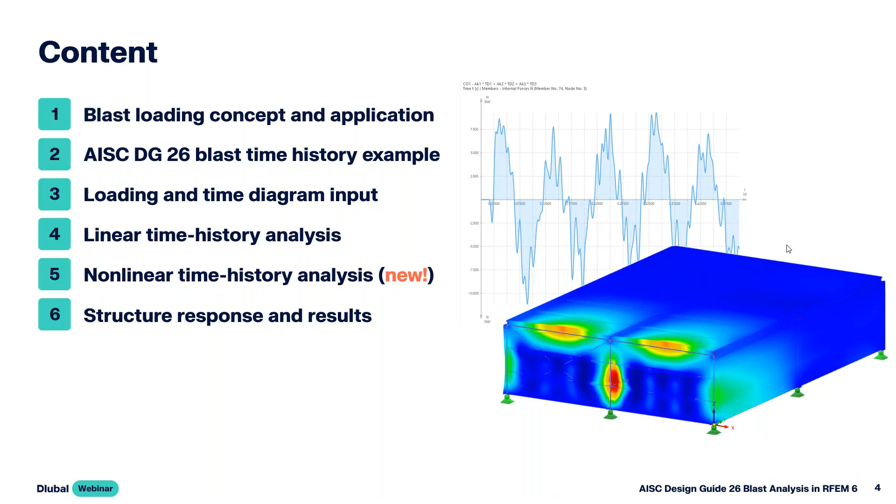So we'll turn now to the blast loading basics. The design resources that we'll be referencing today is, of course, the AISC Design Guide 26. This is the design of blast-resistant structures.

Now, the United Facilities Criteria, UFC document 3-340-02, will also be what we reference today as one of our resources. Now, there are many other references, literature out there for a blast analysis, but again, for our approaches and example today, we'll be utilizing these two.

Let's talk a little bit more about factors that are going to influence the structural damage when we talk about these rare blast loading. So the structure materials, the mass, the stiffness are all certainly going to influence this. But we also want to take a look at the explosive type. How close is the distance to the structure? Obviously, if the explosion is closer, we're going to see more localized and global structural damage than if the explosion is further away. The building geometry will also play an influence.

And then the blast orientation to the structure. So elements facing the blast will see higher loads and more damage than what we see of the elements that are parallel to the blast. And finally, the surrounding structures or adjacent elements. These can also affect blast patterns. We could see load amplification or load reduction.

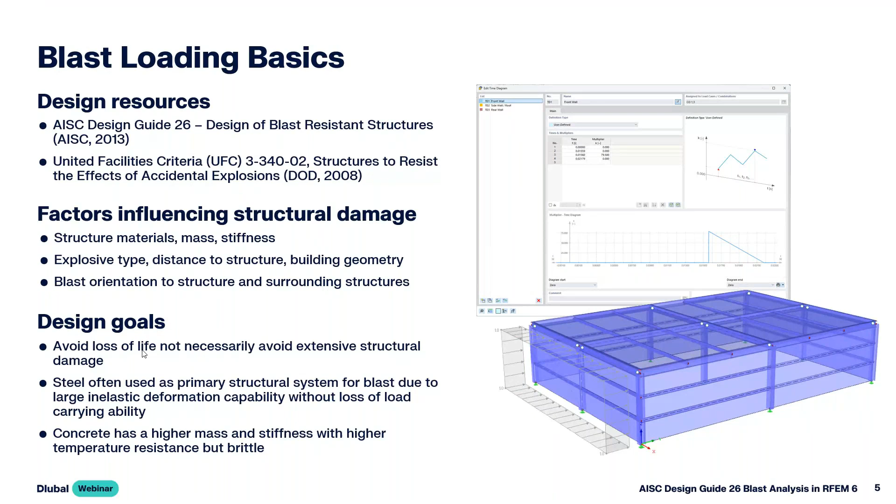So turning now to Design Guide 26 to talk about the blast load application and this idealized pressure time history for blast load.

Over here on the right-hand side is taken directly from the design guide. We want to talk about a few of these variables that go into creating this diagram itself.

We start off with the peak overpressure. This is the pressure above the ambient atmospheric pressure, hence the name overpressure, and it's an instantaneous pressure arriving at the structure. We have this blast load taking place at time equals 0. It takes some time for the blast wave to reach the structure, so we have our time of arrival, and then we see this instantaneous rise in pressure on the structure itself.

We then have the positive phase duration, which is the time for the pressure to return back to ambient pressure. We also have in the positive phase duration what we call the positive impulse, the total pressure-time energy applied during the positive duration, simply the area under the curve. In addition to the positive phase, we also have this negative phase duration, which is the impulse, that area under the curve, that follows the positive phase where pressure actually falls below the atmospheric pressure.

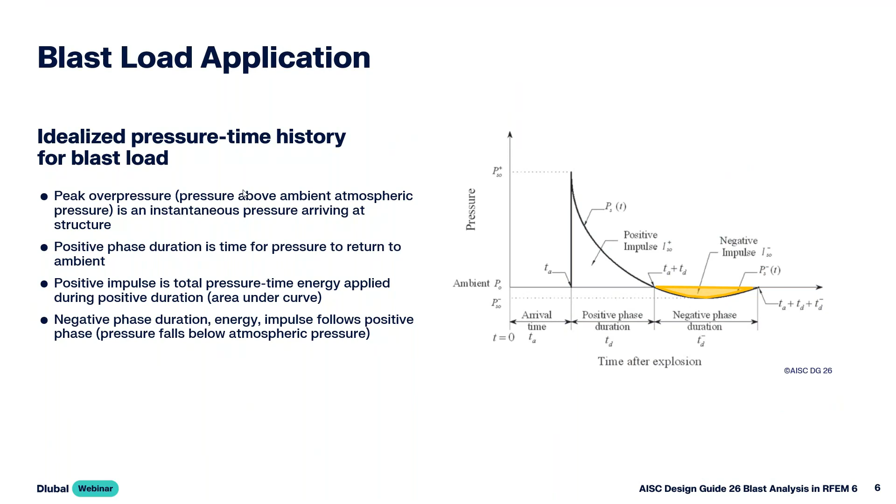This same diagram is shown over here on the right-hand side, but you'll notice we have a couple different lines here. The first is the free field blast load, represented by this dotted line, and then we have the solid line that is the reflected blast load. Let's go into a little bit of detail regarding the differences between these two.

We start first with the free field blast load, also known as the side-on blast load, where this blast actually travels parallel to a surface. It more or less sweeps over this surface with no impeding objects, so we might be talking about sidewalls, a roof, a rear wall—certainly not the surfaces oriented directly to the blast. We often see the subscript SO for side-on used throughout literature to represent this particular loading.

Then we have the reflected blast load. This is where the blast load strikes at an angled surface other than parallel, so we might see this for a wall oriented directly normal to the face of the blast load itself. You'll notice that we have a reflected pressure, P sub R, that's significantly greater than our side-on pressure, and this makes sense because it's closer to the blast and oriented normal to the face of it.

We calculate P sub R with the equation shown here: we take the side-on pressure, the incident pressure, and multiply by what we call the reflection coefficient C sub R.

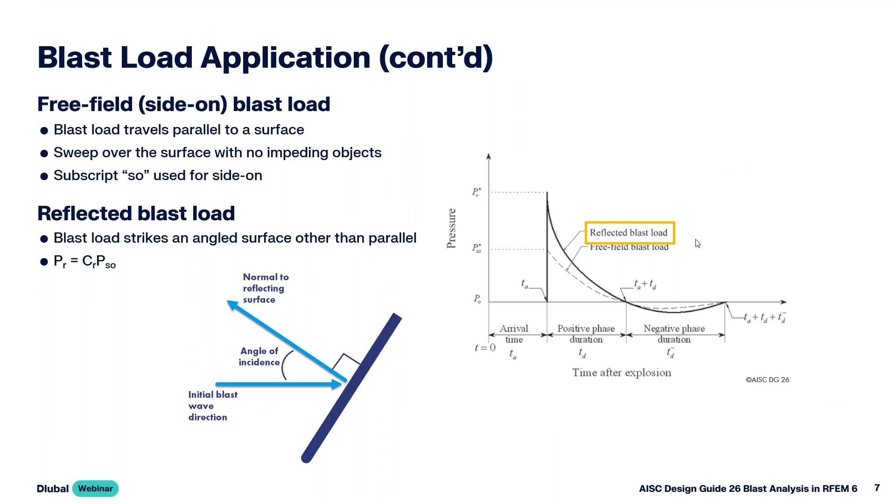We are going to reference the UFC document 3-340, in particular figure 2-193. Within this plot along the x-axis, we can see the angle of incidence. We would determine what our angle of incidence is, follow this up, and you'll notice that the peak incident overpressure is given with these various colored lines, also known as the side-on pressure. We follow this over to the y-axis to get the reflection coefficient value.

Now, we may be wondering, what is the angle of incidence along the x-axis? We'll refer to this small diagram over here on the left-hand side, where we have our initial blast wave direction, and this travels to our target element—this might be a wall element, for example. We're going to see this load reflecting normal to the face of the surface, hence why we see this 90 degrees here. The angle of incidence is measured as this initial blast wave in comparison to this reflecting load, and this is ultimately what we use with figure 2-193.

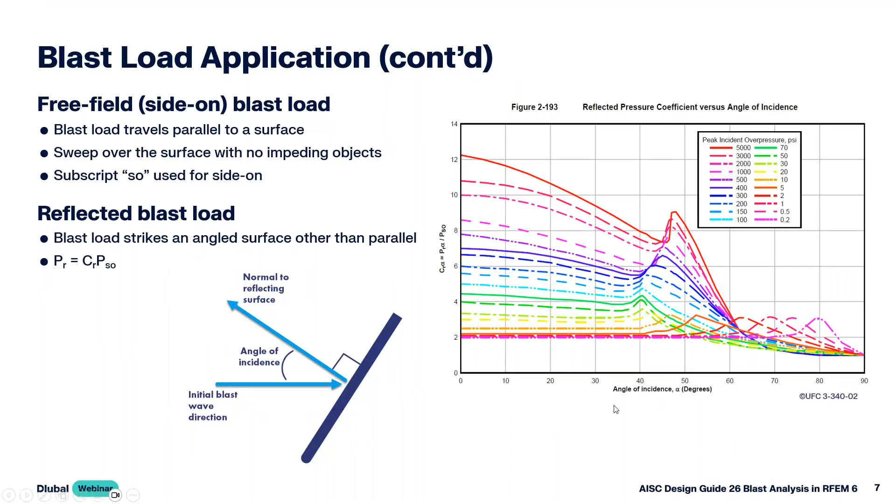Turning now to Design Guide 26, let's look at the assumptions here for creating these time diagrams, beginning first with the pressure time history positive phase. Design Guide 26 states that we can simplify this to a triangular distribution, where we still have this instantaneous rise in pressure, but instead of a curved decay, we have a linear decay back to the ambient pressure. It's really important that we still maintain that peak pressure value and the impulse, which is the area under the curve. So therefore, we have this fictitious time here that we need to determine in order to simplify this with this triangular distribution.

The equation that we use for this duration is equal to 2I over P.

Moving on to the pressure time history for the negative phase, we're actually going to neglect this for this demonstration. So a little bit simpler approach here, but we certainly don't want to always neglect this. For example, when we have elements that are weaker in the reverse loading direction, or if we have a structure with very short natural periods compared to the load duration, then we certainly don't want to neglect this negative phase. But again, for example purposes for us today, we will go ahead and not take this into account.

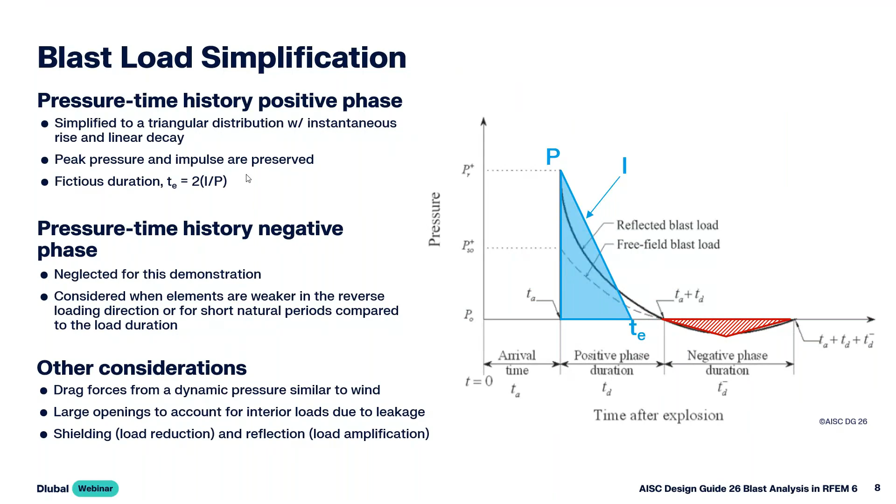Also, we talked a little bit about those adjacent objects. If we have buildings that are in front of our target structure that we're designing, this could certainly be beneficial because we would see the shielding or a load reduction. But in turn, these adjacent objects can also cause a reflection or load amplification. Again, not considered for today's example, but all very important points to consider if you are carrying out a blast analysis. So we're now going to turn to RFEM 6, and we want to begin our example today.

Now, we won't be touching on either of these more seismic focused add-ons for today. But finally, we do have the time history analysis, and this will certainly be a big part of our example once we do get into RFEM, where we can apply these forces to the structure and tell them how they should vary in magnitude over a set time period.

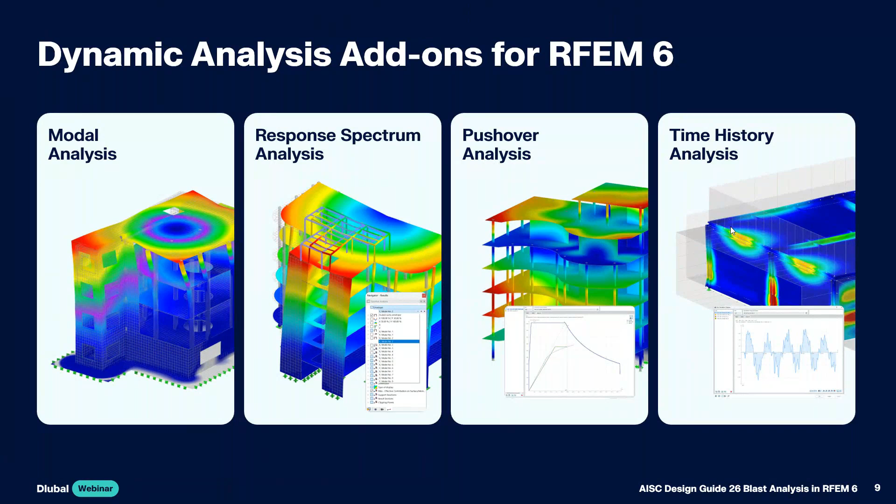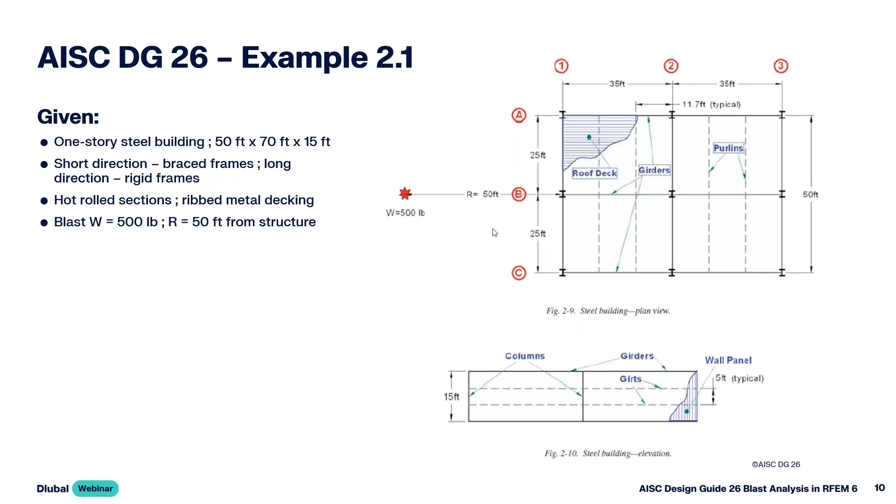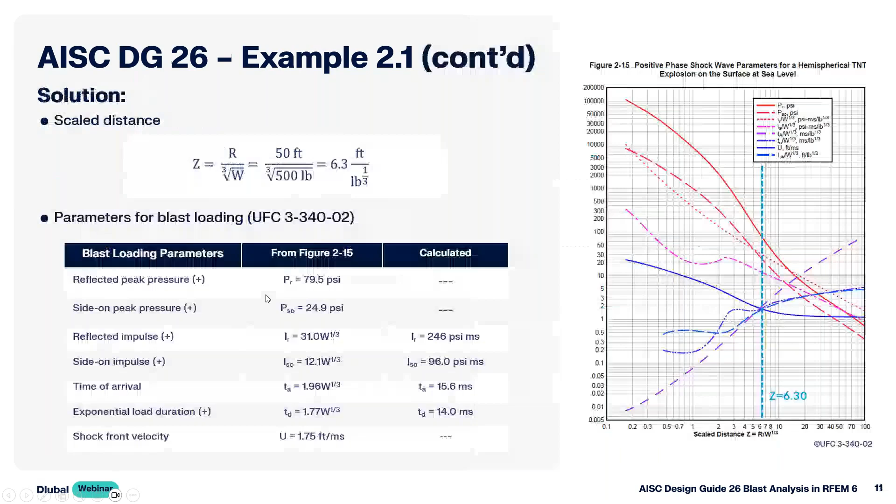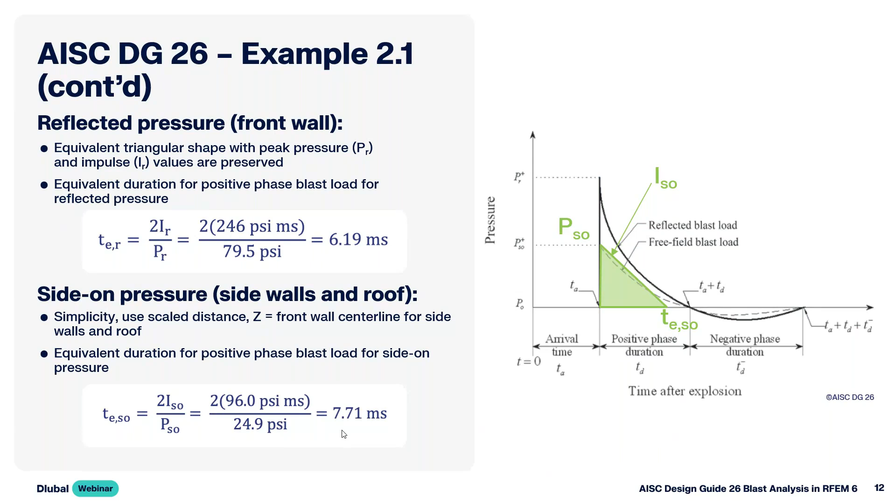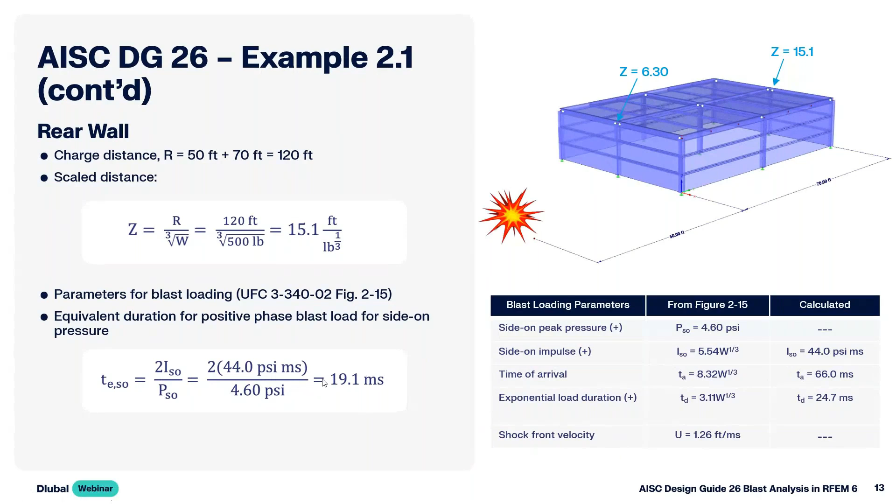Now, the rear wall is a little bit unique too, in the fact that we aren't going to have this instantaneous rise in pressure, like what we saw with the front wall or even the side walls and the roof. It's going to take some time for the pressure to linearly increase to the value of the peak pressure, and then we linearly decrease. So we know the time of arrival, that's equal to 66 milliseconds.

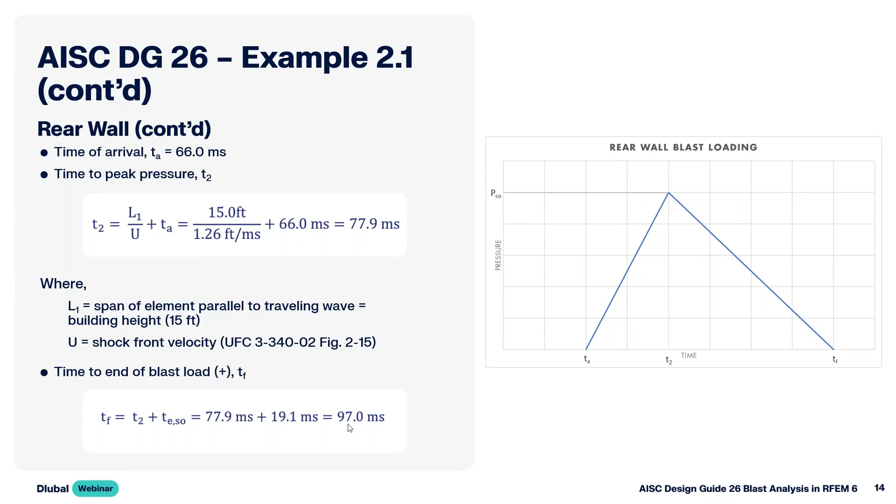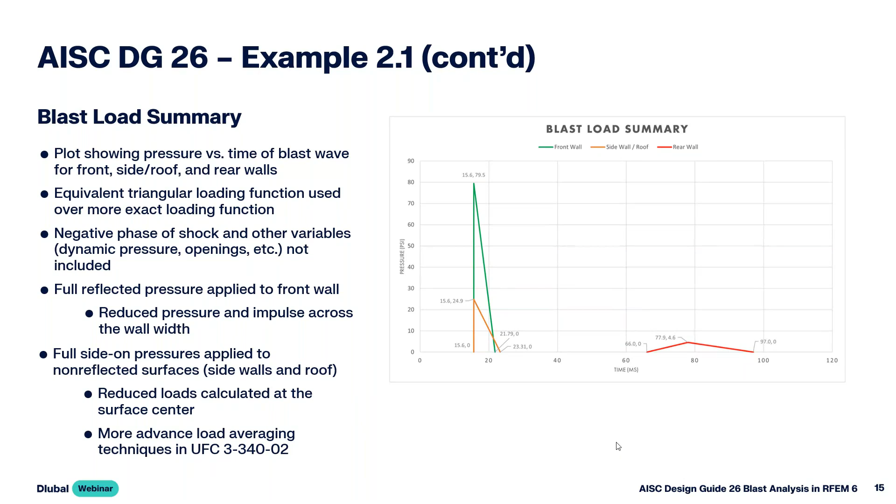Okay, so we are going to turn now to RFEM directly, and I will go ahead and launch the program here. So you'll notice for the sake of time, I have already modeled our structure from the Design Guide example given. So we'll do a quick model review. There were some assumptions made, for example, with the cross sections. So we have W14x193 defined for our columns, A992 material.

Our girders are defined as 18x130. We do have our purlins here, channel sections, 10x25, A36 material, and then we have our girts, which are 10x30, also A36. Now, because we have braced frames in our short direction, I did add in here some X bracing. And these are just going to be round circular sections, such as a rod, for example. But you'll notice that the member type here is unique.

All the rest of our members in this example are set to a standard beam. This is anything that's a standard beam, a standard column. But for my X braces, I have set this to a tension-only member. This means that it should only take tension forces. If compression is introduced into this member, it is deactivated within the static analysis. And if tension is reintroduced, it will be reactivated due to the nonlinear capabilities within RFEM. So just something to keep in mind there.

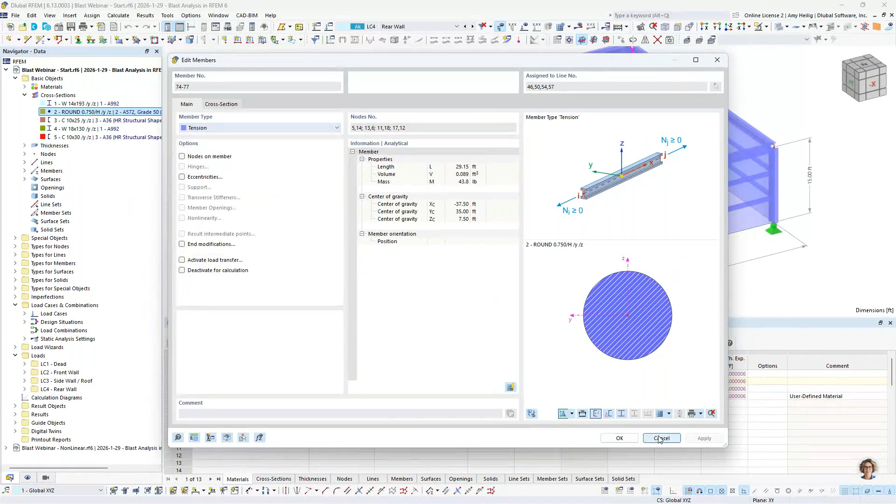Now, as far as our surfaces, all the surfaces are defined here. So we'll take a quick look at the front surface, for example. All have the material A653 applied to them and a set thickness. Now, this thickness is a bit unique as well. So if we take a look at the thickness type, normally we would set this to a uniform thickness, which is just any type of standard surface. But I did set this to an orthotropic stiffness instead.

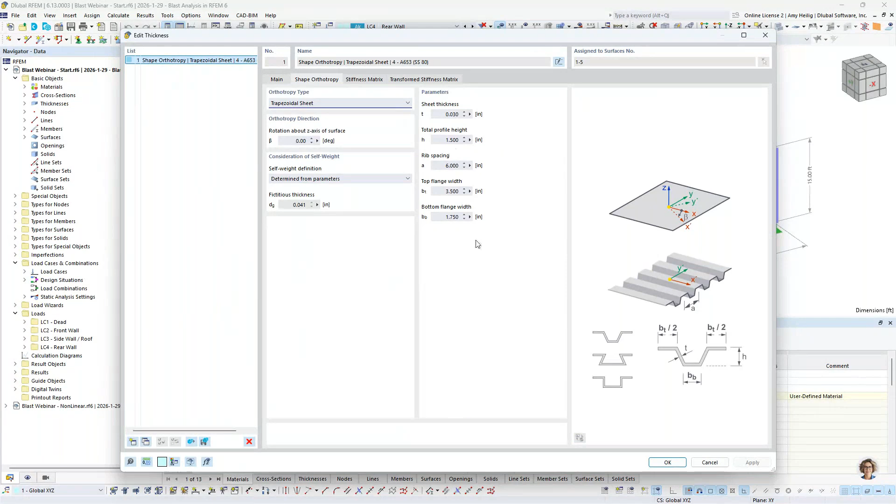And with this orthotropic entry, we now get this second tab here where I can directly select something like a trapezoidal sheet. And I can input the sheet thickness, some of the geometric properties like the total profile height, the rib spacing, and so on. And the program is going to take all of this information and directly calculate the stiffness matrix based on these orthotropic stiffness properties. So this is all done automatically, and you have a nice view here of the stiffness matrix directly.

Okay, so the final thing just to note is, of course, the dimensions. We talked about 50 feet in the short direction, 70 feet in the long direction, 15 feet in height. And our blast analysis is going to be taking place about 50 feet away from the front face of this wall here. Now, we also want to cover our loading.

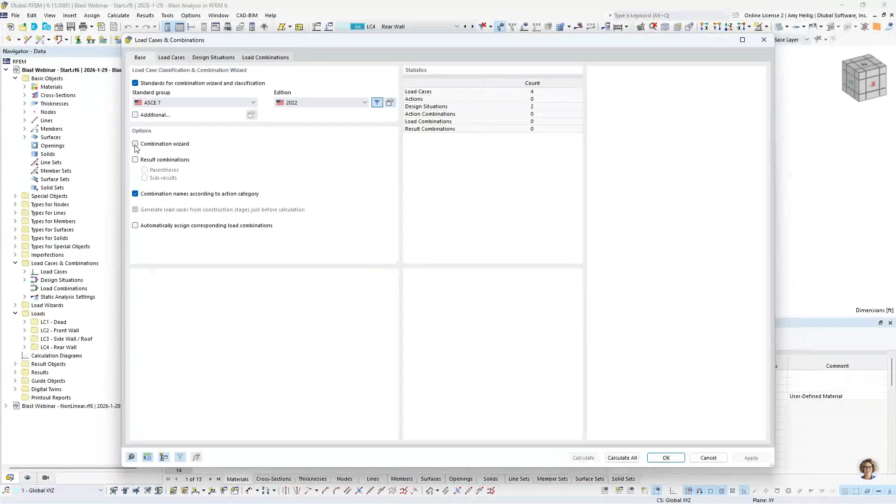So I will launch our load cases and combinations dialog box. And under the base data, I have set here the ASCE 7, the latest 2022 standard. Now, this really doesn't play too much of an impact in our example today because I'm not generating my load combinations automatically. You can see this is turned off here. Now, under the second tab, these are the various load cases that I've defined. And we start first with our dead load case. So we have self-weight activated within this load case. And I did assign the action category here based on the ASCE 7 to dead load.

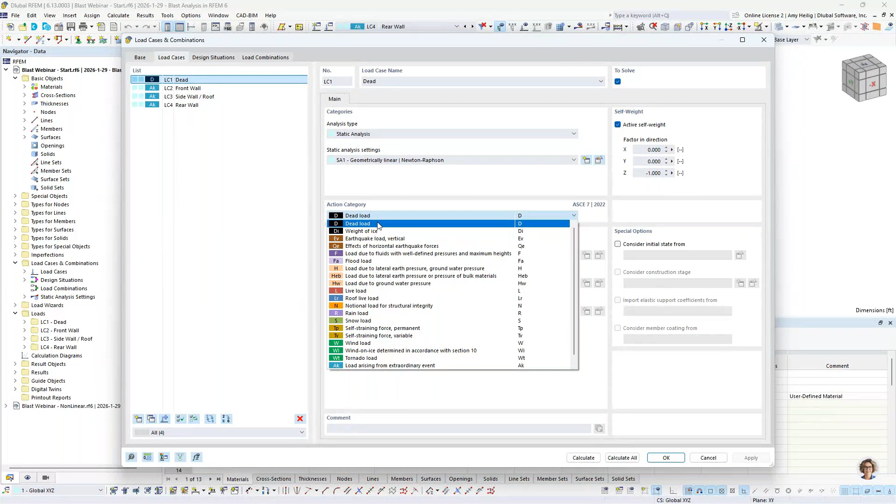Now, again, this isn't so important. If we were combining into the load combinations automatically, the program would need to know this in order to know what load factors are defined. But just for a nice categorization, we'll go ahead and apply this to the correct action category. I have 3 additional load cases here, including the front wall, the sidewall and roof, as well as the rear wall. So this is going to represent these loads from the blast being applied to the structure. The action category here is set to the load arising from extraordinary event.

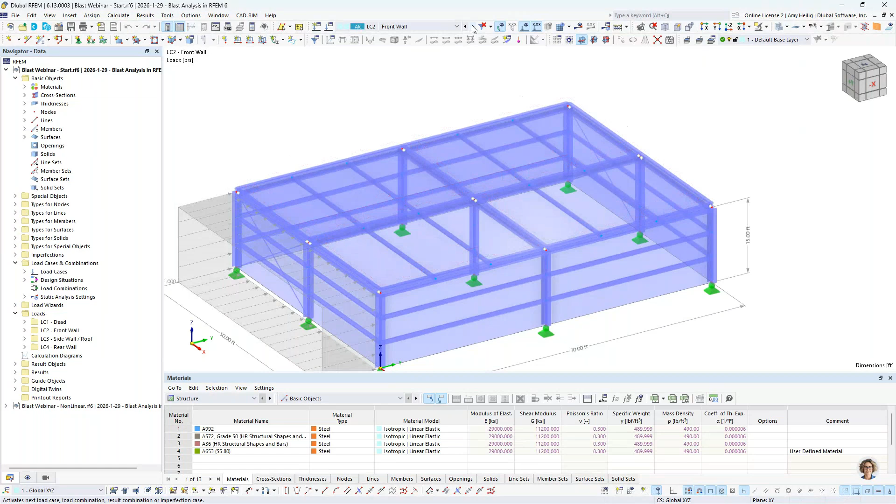So now that we have our load cases defined, we need to actually apply the loads to the structure. And we begin first with our dead load. So remember, self-weight is considered here, but also I have applied an additional member load to my main girders up at the top of 0.1 kips per foot, just to account for any additional dead load within the structure. I then have that first load case here for my front wall. So you can see that this is a uniform load applied to this front face of this surface.

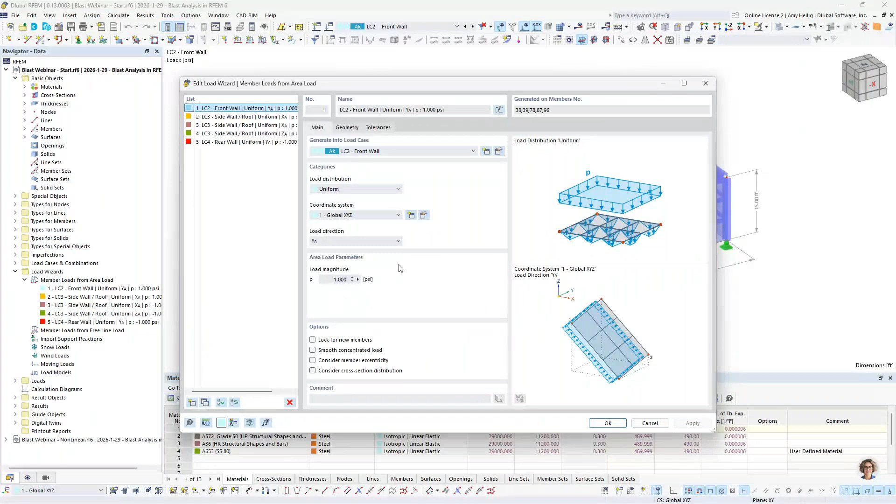Now, this load is a bit special in the sense that I did take advantage here of our load wizards over in the navigator, where I can apply these as member loads by specifying an area load. So if I double click on this load, we go into the load wizard dialog box. I have applied the load in the global Y direction towards that front face of the structure, and I gave it a load magnitude of 1 psi. This is just a simple unit load. We're going to later on define the time diagram where this load is going to vary in magnitude. So we don't want to do it here with this applied load. This is why it's just a simple 1 psi.

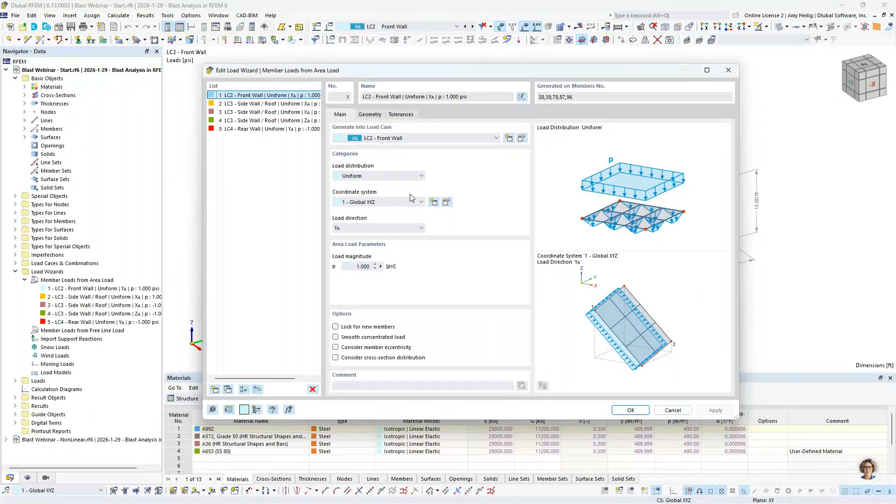Now, if any of your units are incorrect, you can always access down here the units and decimal places and make adjustments to that. We also have the ability here to select the 4 points for this area load, and we can also neglect members. So for example, I didn't want to consider the load being applied to my girts.

So once this is done, you'll see we get a nice view here of the tributary area of the members that this load will be applied to. And we can take this a step further by right-clicking and displaying separately to see the load actually applied to the structure itself and the particular members that I have selected.

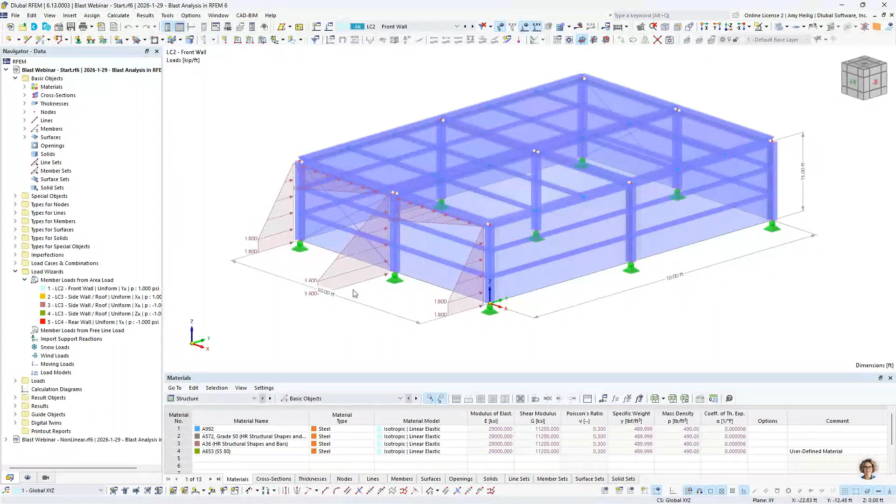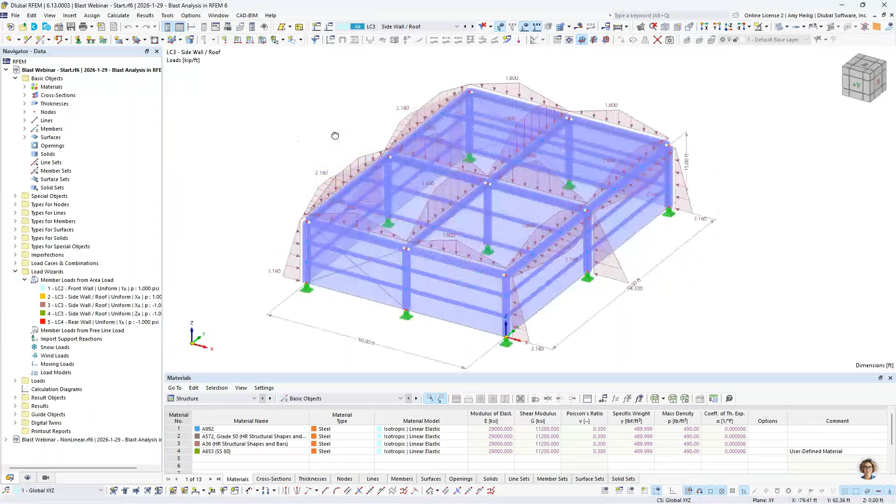So we can right-click to turn this back to a uniform load display, and we can take a look at our second load case for the blast load. Very similar concept here, but this time it's applied to the sidewalls and the roof. We can right-click here to display separately, and again, we see those loads distributed here to the main members, neglecting again the girts and the purlins. And finally, we have our last load case here for our rear wall, so same concept there.

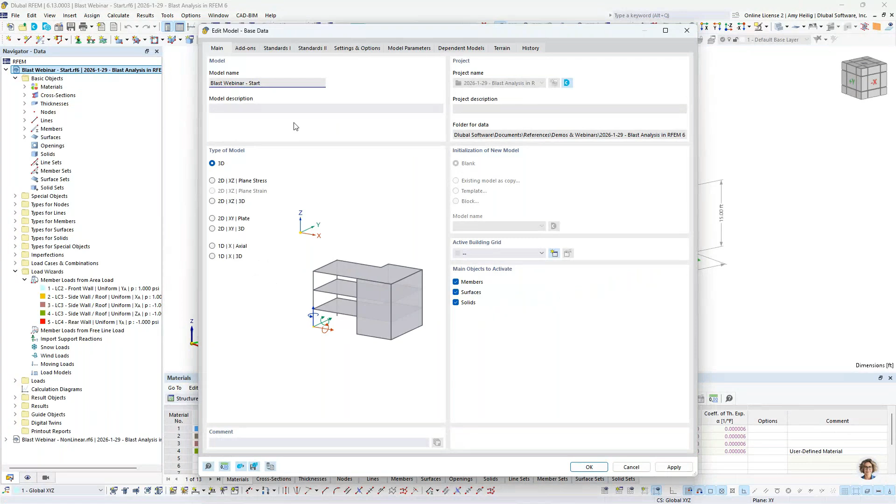So now that we have these loads defined on the structure, we're ready to move forward with our dynamic analysis. And for this, we need to activate our base data dialog box. So this can be found by right-clicking on the model name here in our navigator, or it can be accessed through our quick tools up here in the top. This is essentially the dialog box that will pop up when we create a new RFEM model. And under this second tab, you'll see here, these are the various add-ons that we can go ahead and activate within our RFEM model itself.

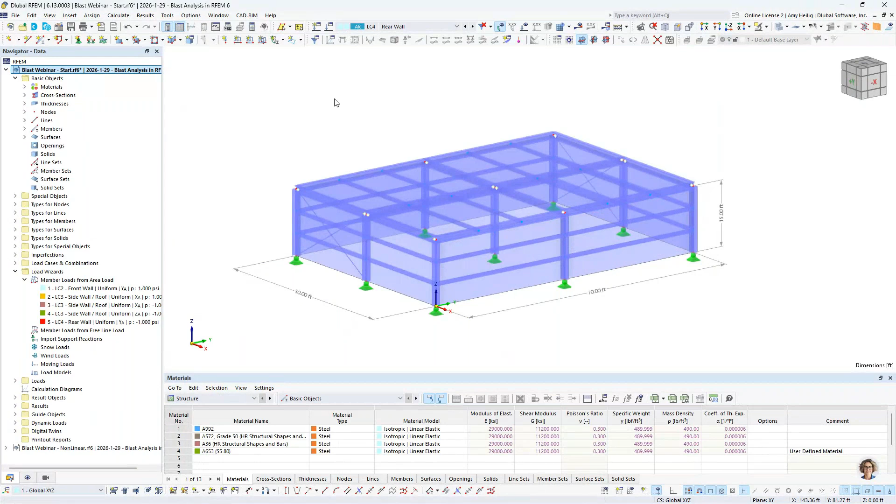For today, I am going to move forward with both the modal analysis and the time history analysis. So when we activate those add-ons and come back into RFEM, you can see that really doesn't look too much different. So what we want to do is to go into the load cases and combinations dialog box, and I'm going to create a new load case here. This is going to be for my modal analysis. Now the analysis type here is going to be toggled down to modal analysis. This is available to me because I've activated that particular add-on.

We then want to adjust the modal analysis settings. So for this, I'm going to calculate a total of 40 eigenmodes. I want to make sure that I get enough mass participation, that I kind of understand what's going on with our structure. We'll go ahead and leave this as the Lanczos solver. I'm going to modify the mass matrix to diagonal.

Now, remember that this load, this blast load, is traveling from the front of our structure to the rear of the structure in the global Y axis. And we can't see that because of this dialog box, but that's kind of what's happening there for the overall analysis. So therefore, just for a quick calculation and to really hone in on what's going on in the Y translation direction only, I'm going to deactivate the additional degrees of freedom here for my mass matrix.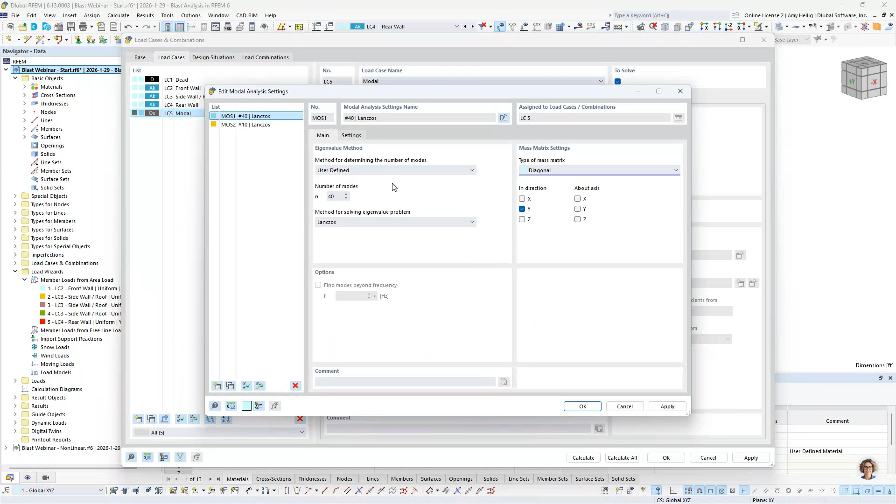Now, for any further information on the different mass matrix types, solver types, you can always click on this info button in the lower left-hand corner of these dialog boxes. This will take you directly to our online manual and this particular dialog box to explain these options further. Now, the additional settings here can all be left as default, so I can click OK.

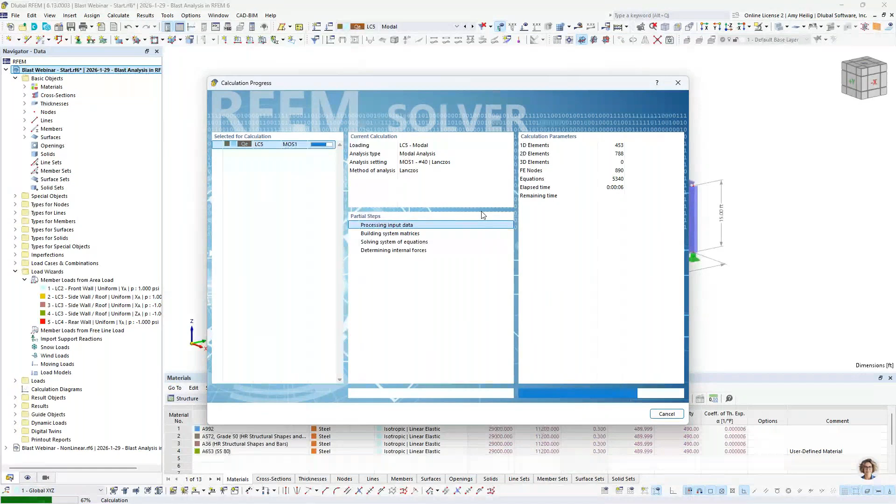We are going to import in the masses from our dead load case. We also have the ability, if we wanted to create a mass combination, we could do so. And essentially, we'll get a pretty quick analysis here. Again, the program is going to determine those 40 different eigenmodes, and we are presented with our analysis results. So you see here that we have our modal analysis results presented to us in table format, and we now have a new tab over here in our navigator with the results shown as well.

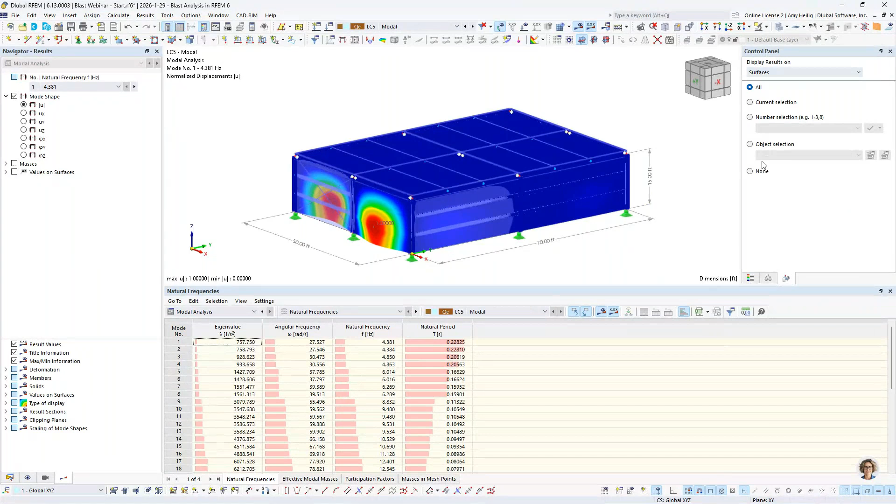Because these loads are being applied to the members themselves, I'm not so interested in what's going on here with the surfaces. So I can always deactivate the surfaces from the display of my results by toggling this to none. And taking a look at the members themselves, and in particular, the second tab within the table, we want to determine here what are our dominant mode shapes. So remember, we're only looking in the Y direction.

And as I scroll down through this table, I see mode number 9. This certainly has the most mass participation, so this will be one of our dominant modes. And I want to note here that the natural frequency is updated over on the left. So we'd want to write this number down, 8.832 hertz, because we're going to utilize this later on for damping purposes. And then we continue scrolling down to maybe find our second dominant mode, and that's going to be mode shape number 27. And we have a frequency here of 15.963. So we'll go ahead and write that one down as well.

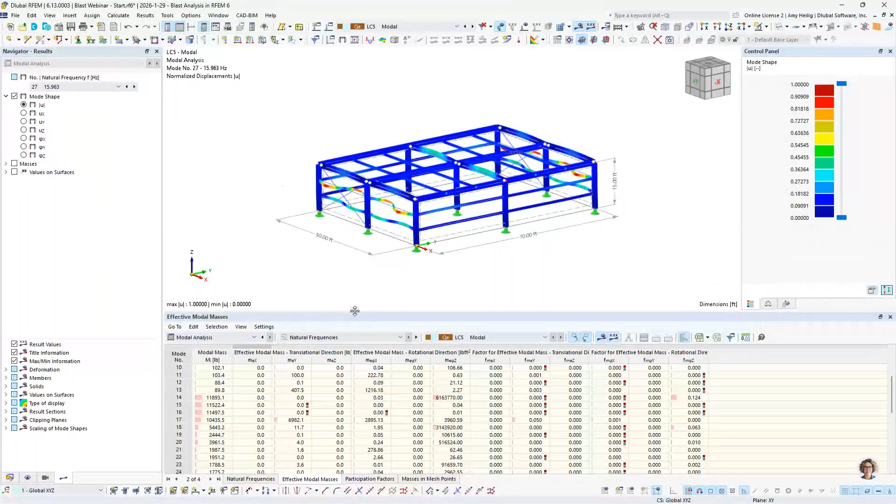So now that we have this information, again, it will make a little bit more sense as we move forward. And you can also view here under the first tab, if you're interested in viewing mode shape number 9, we can see the angular frequency, again, that same natural frequency, natural periods. And we probably also are interested in mode shape number 27. So just keep those natural frequencies in mind. We'll return back to them when it comes to inputting in the damping for the time history analysis.

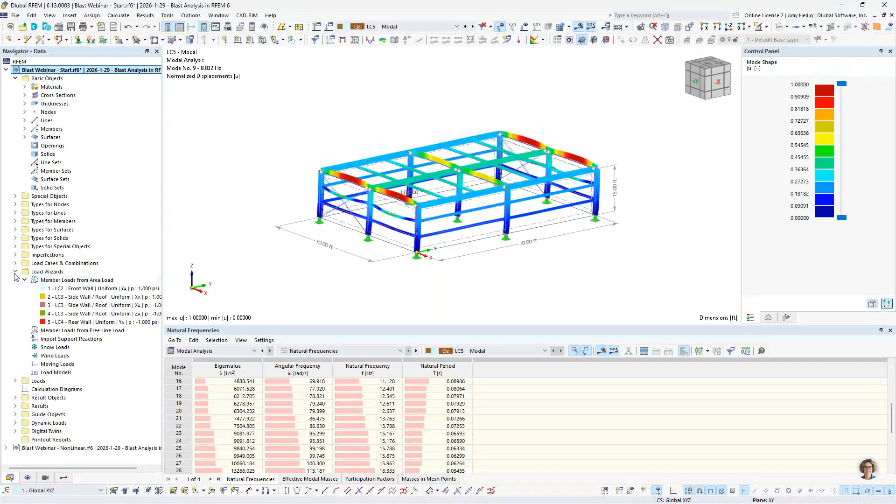So now that we have completed a quick modal analysis, let us move on to the time history. And in our navigator over on the left, we have a new folder here that you will see called dynamic loads. And this is because I've activated that time history analysis add-on where I can directly define my time diagram. So I double click to create my first definition here. And within my time diagram, this is where we're going to begin inputting in our information that we have determined from those slides and from Design Guide 26.

So we're going to start off first by giving this a new name here, and we're going to call this one front wall. Now, as far as our time diagram input, we have two options. We can set this to user defined, which we can just input in the table values directly. And that's certainly what we'll be using today. Now, alternatively, if you had a function, so we talked a little bit about that Friedlander equation to maybe represent that idealized pressure curve in a little bit more detail, you can input in something like that function directly in RFEM as well.

So for our front wall and taking advantage of the user defined option here, let us go back to the PowerPoint because I want to focus on this time diagram for the front wall only. And if you remember, we have already determined all of these points from our previous calculations. We have our instantaneous rise in pressure to 79.5 psi, and then this linear decay back to 0. We have already determined what these time values are at each of these points. So these are going to be the points that we directly input into RFEM for our first time diagram.

So we go back to the program here, and our first point is going to be at time 0 with a multiplier of 0. So remember, we're going to apply this time diagram to that unit load back in that particular load case that I showed you earlier to tell the program how to vary the load magnitude over a set time. So therefore, our second point is going to be 0.01559. The multiplier is still set to 0. But now finally, under the third input option here, we type in a time of 0.0156 with a multiplier of 79.5. And finally, our fourth point will be 0.02179 with a value of 0.

So you can see that our time diagram shown here in RFEM exactly replicates what we just saw in the PowerPoint example. Now you'll notice I don't have the ability here to set the same time for step 2 and step 3 here to 0.0156. The program will give you an error. So I had to offset this instantaneous rise in pressure just slightly with the multiplier of 0.

We know all of these times as we have solved for them. So again, this is the information we want to put directly in RFEM for our second time diagram. So the first three time inputs are actually all the same, but we do want to modify our multiplier here, which again is going to be that peak side-on pressure, to 24.9 psi.

And then our linear decay back to zero is also slightly adjusted from our front wall, and this will be 0.02331. So with the program plotting these various points, we now see our time diagram that reflects our PowerPoint slide that we were just taking a look at.

So we then have our final time diagram. And for this one, I'm going to create a new definition here, and this will be for the rear wall. We'll go back to our PowerPoint for the final time here to take a look at the time diagram we have determined for the rear wall.

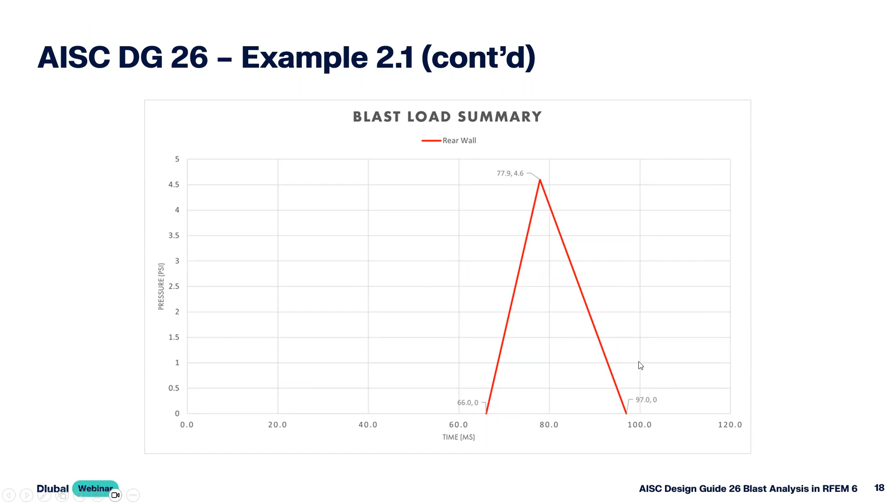Now remember, this one looks a little bit different because it does take some time for that blast wave to reach the structure, but we have a linear rise here to that peak pressure, and then we'll see it decay linearly back to zero. Again, we know all of these points here, so this is directly what we will input for our third time diagram.

The time zero with a magnifier or multiplier of zero, and then our second point will be 0.066, with the multiplier here also zero. Our third point will be 0.0779, and a multiplier of 4.6. Our final point is going to be 0.097 with a multiplier of 0. So therefore, we see that relevant time diagram shown here that replicates what we just saw in the PowerPoint.

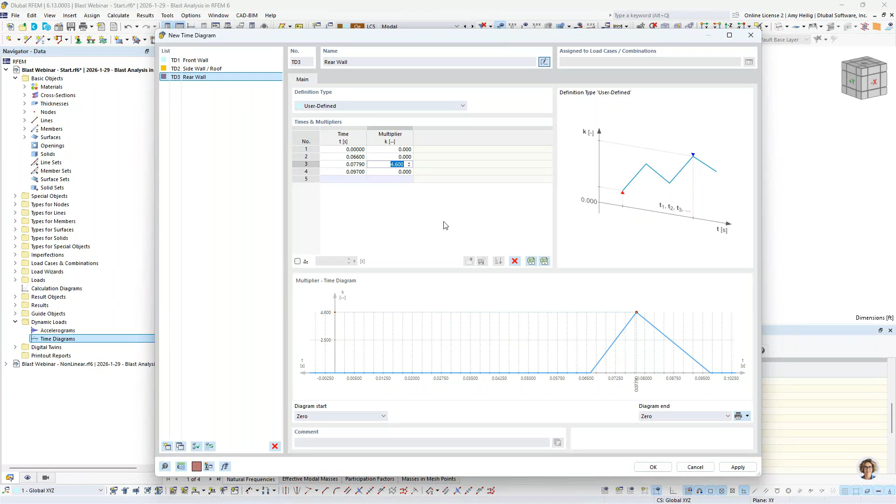Okay, so now that we have created these time diagrams, we need to actually correlate them with those unit loads that we had applied to our structure under the load cases. So we'll go ahead and click OK through this dialog box, and we're going to go into our load cases and combinations. Now, I certainly could run a time history analysis for these individual load cases, as you see here within our dropdown, but that's not the intent of this example.

The structure is not going to experience the front wall blast initially, and then the side wall and roof separate from the front wall and rear wall. All of this is happening at one time, but the magnitudes are going to vary over that time duration.

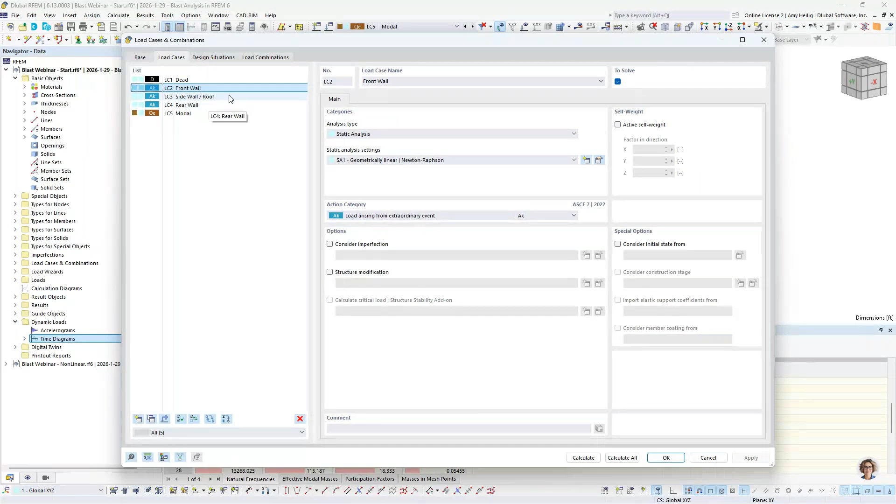And the only way to combine all of these into a single time history analysis is under our load combinations tab. So we create a new load combination definition here, and the analysis type is going to be set to time history analysis. Well, now we have our time history analysis settings that we'll want to go through in a little bit more detail here.

So within the dropdown, you'll see that we have two linear solvers, including the linear modal, which is going to be a decoupled system that's based on the model's eigenvalues and mode shapes. So a modal analysis with this solver is incredibly important. We want to make sure that we do have an accurate modal analysis.

Now, for our example today, we are going to utilize the linear implicit Newmark solver instead. So this is a direct time integration method. It does require sufficiently small time steps, but a big difference here is that we don't need that modal analysis whatsoever. So the modal analysis that we carried out earlier in this example technically isn't needed. I am going to use it for damping purposes, which will again make more sense in just a few minutes, but the modal analysis is not necessarily needed for this solver.

So with both of these linear solvers, keep in mind that any nonlinearities are automatically going to be converted to linear elements underneath the hood for this dynamic analysis. So if we had a nodal support that fails in uplift, but in downward compression fully re-engages, underneath the hood for the dynamic analysis, it will be just converted to a linear nodal support.

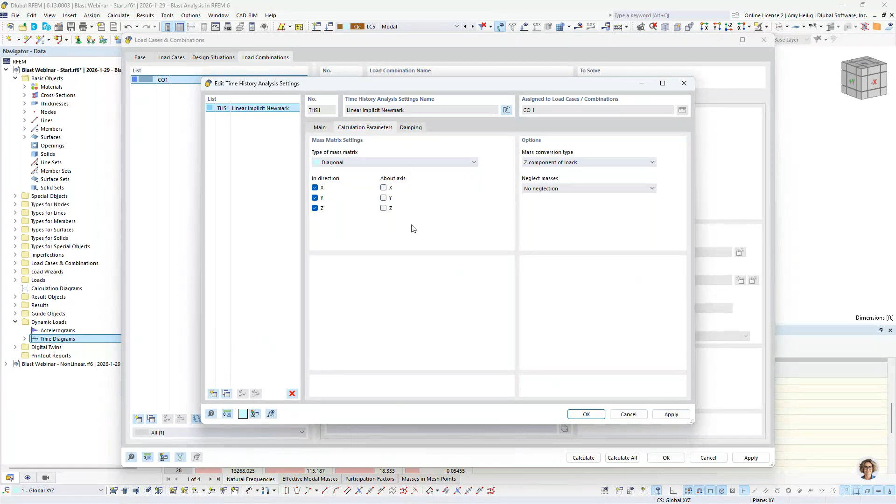For the calculation parameters, I will modify the mass matrix to diagonal, though there's maybe not too much difference between consistent versus diagonal here. I'm going to uncheck the degrees of freedom for rotation about the global axes, but leave translation activated for this mass matrix.

Finally, we have our damping. When we talk about the Newmark solver and damping, we always refer to the Rayleigh damping parameters, alpha and beta, where alpha is the mass portion of that damping matrix, and beta is the stiffness portion of that damping matrix. So we want to ensure these parameters are input correctly.

Most of us might be used to Lehr's damping, where we just have a set percentage to input for the damping itself. We have a nice tool here where we can convert from Lehr's damping to Rayleigh damping by inputting the natural frequencies of our two most dominant mode shapes. This should ring a bell - this is why we carried out that modal analysis to determine the two dominant mode shapes.

Remember, we wrote down the relevant frequencies from mode shape number 9 as 8.652 hertz, and our frequency from our second dominant mode shape, mode number 27, is 15.963. Now, the Lehr's damping is 2% for this structure, so I can input this information directly, and alpha and beta are directly calculated for me - a nice feature for the damping considerations.

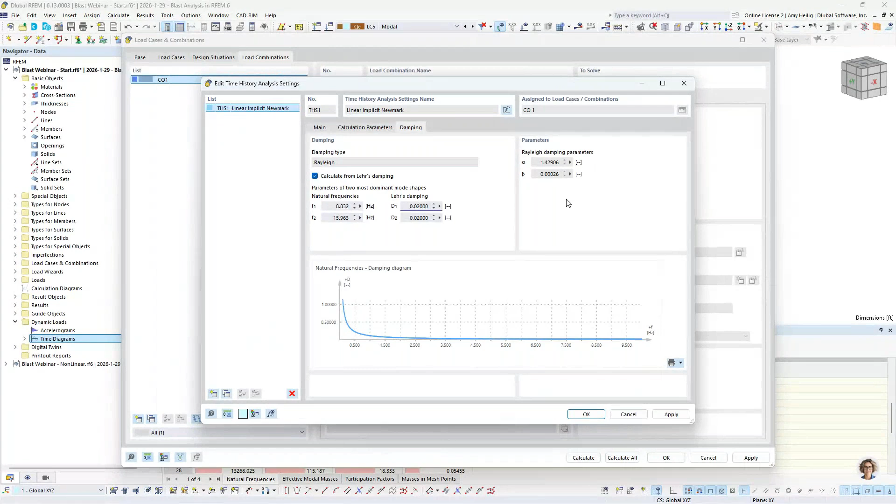Once all of this information is input, we're going to import the masses from the dead load case once again. Under the assignment, this is where we move our 3 different load cases over to the right-hand side by double-clicking on them and relating them to the relevant time diagrams. So we have our front wall related to time diagram number 1, our sidewalls and roof related to time diagram number 2, and finally the rear wall related to time diagram number 3.

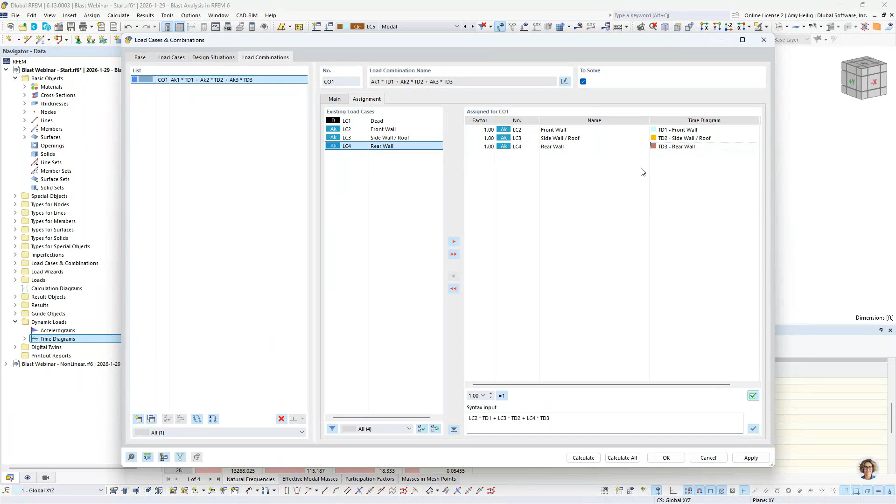So I'm going to begin this calculation here. For this linear solver and the time steps that I have set, we will see this solve pretty quickly.

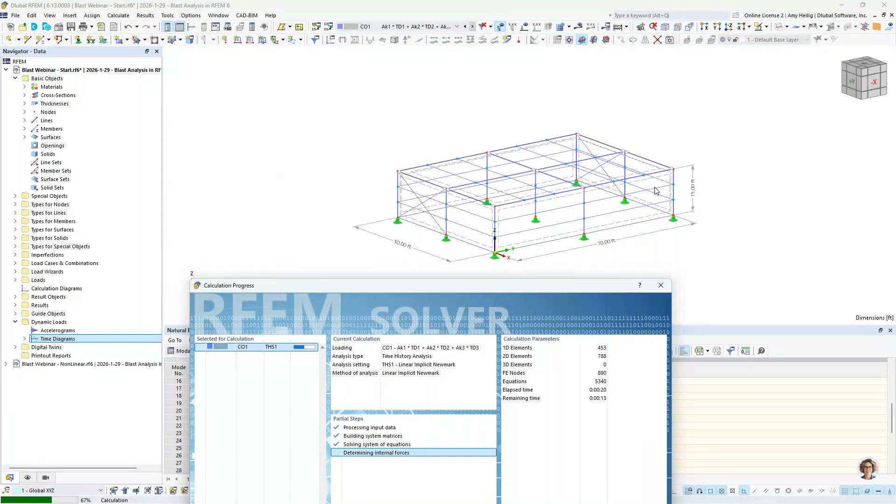So what's happening here in the background? We're now going to apply each one of those unit loads - remember, we had the area load at the front face, the sidewalls, the roof, and the rear wall of the structure. But now we're going to apply those 3 separate time diagrams to tell the program how the load magnitude of this blast wave should vary over the total time duration of 0.5 seconds.

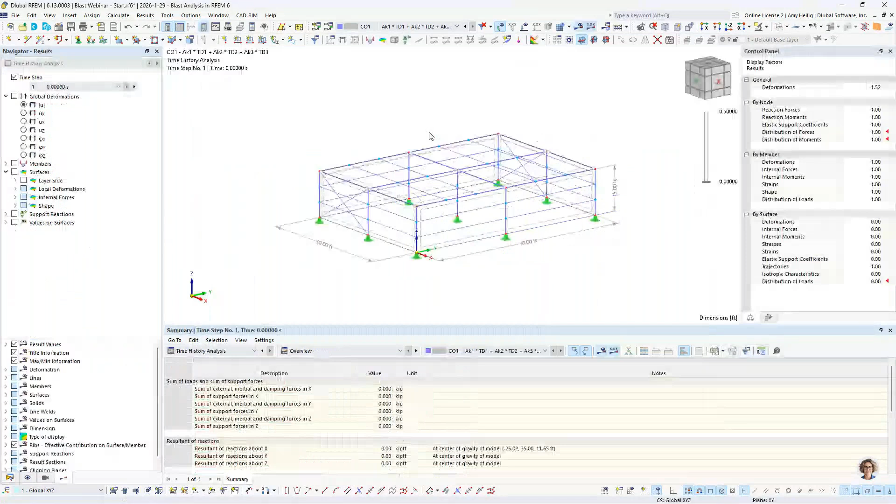Once this calculation is done, we'll see our results here within the navigator over on the left, but I'll also go ahead and activate my surfaces within table format. As we take a look at the save time steps here within our dropdown, we cycle through these and we see not much is happening.

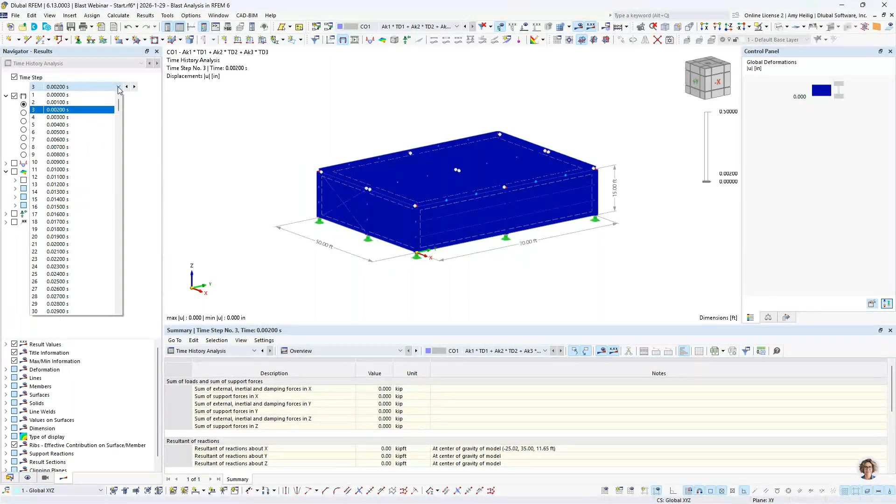It's going to take a small time period before this blast wave actually reaches this structure, and that happens at 0.016 seconds. This is where we start to see deformations on the structure. So we can cycle through these time steps to see the deformation graphically change here as that wave load moves from the front of the structure to the rear.

The time history analysis results are also available here in table format. So for example, if we're interested in the internal forces of our members as an envelope solution for this time history analysis, we can export this information to Microsoft Excel with the click of a button for further sorting. This could certainly be beneficial to review as well.

One other nice feature that you may not be aware of is up here in our tools, we have what's called the calculation diagram monitor. So I can activate this and you'll notice it populates down here, and maybe I temporarily close out my table. This has a drop down here that includes all of the result information from this time history analysis. So if I want to take a look at my acceleration of a particular nodal point, I select that here.

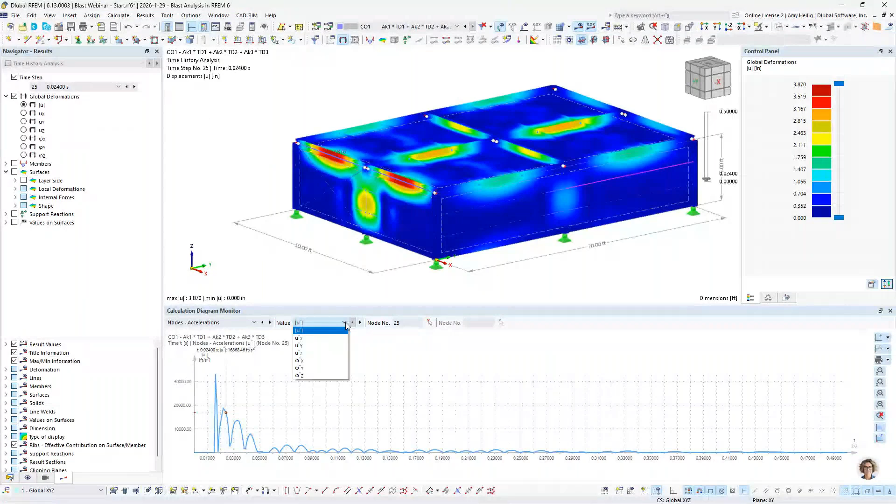I could graphically select maybe a node at the front of the structure, and maybe I'm interested in the accelerations in the Y direction. So we see that plotted here within the diagram monitor over the 0.5 second duration. We could also toggle this to maybe the global deformation of that same node, and maybe I'm interested in the global Y deformation only. So again, we can see that plotted out here as that wave load moves from front to the back of the structure. We can also right click under the time steps here to start this animation.

You'll notice that the program is kind of moving through step by step here. The deformations are changing graphically to show you in more detail what's going on.

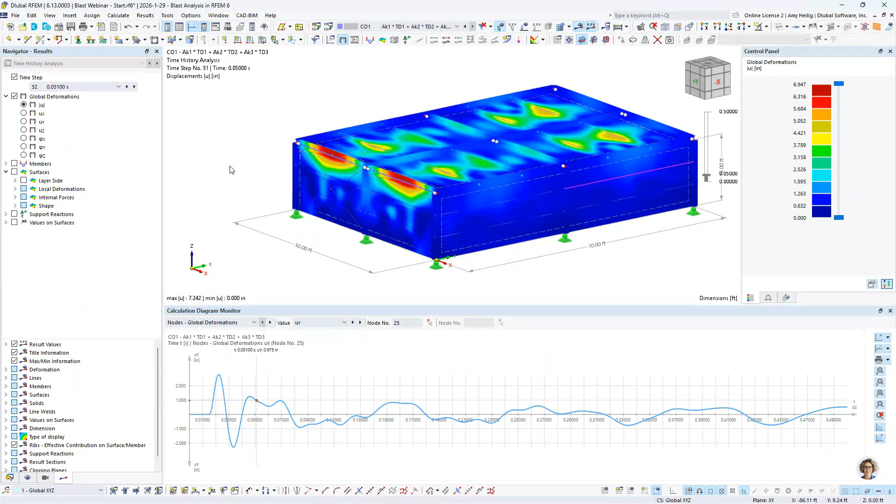The final thing that we'll touch on is under the navigator for this linear analysis is the calculation diagrams. This is actually very similar to the calculation diagram monitor. The benefit of this though is that we can create as many calculation diagrams as we want, and this will actually be saved to the model. So we can begin with first a time history analysis with our analysis type.

The program says, okay, I need to toggle this to my load combination then, because that's the only time history analysis I carried out. We have our time on the x-axis here, and on the y-axis, we have that exact same information that we previously saw with our diagram monitor.

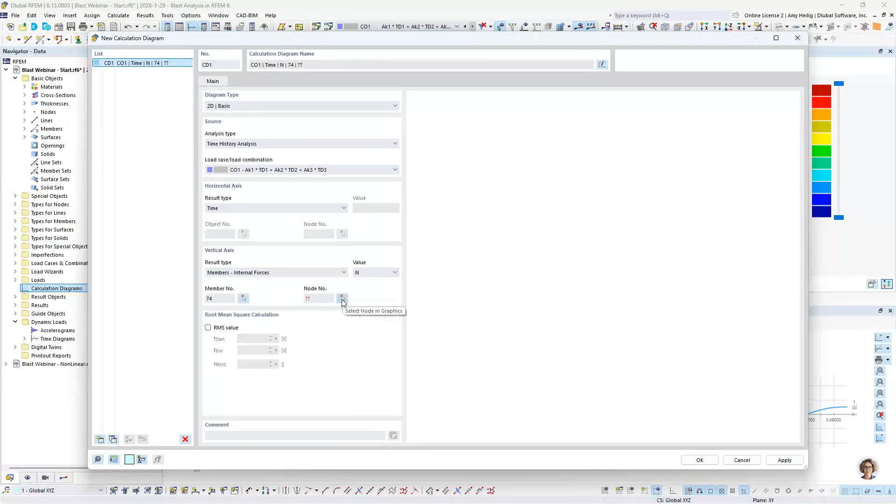Perhaps we want to take a look at the member internal forces, and I'm going to select here the axial forces, and I'm going to graphically select my tension only member, member number 74. I also need to choose a node along that member in order to plot out the internal forces at that particular location. What you'll notice is that this tension only member certainly has tension forces in the positive region of this diagram, but because we're utilizing that linear solver, it is converted to a truss element underneath the hood for this dynamic analysis. So now we're seeing a lot of compression forces within this member as well.

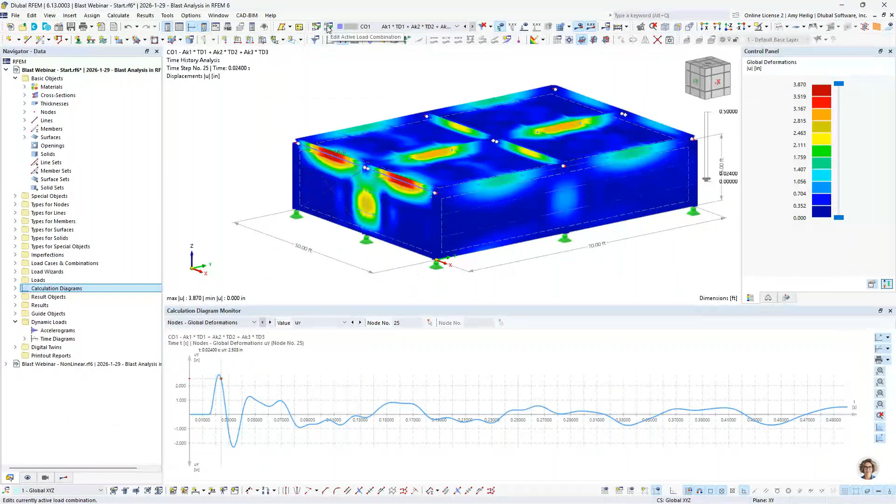So we'll kind of wrap up here the linear analysis. Now, because we have these nonlinear elements, maybe we want to turn now to a nonlinear time history analysis. So I'll go ahead and click OK in this diagram, and we will revisit here our load combinations dialog box.

This is quite easy, as I'm going to make an exact copy of my existing load combination number 1. You can see it copied here, but I'm going to go into the time history analysis settings, and I'm going to make a copy of my existing settings. And I'm going to select here the nonlinear implicit Newmark solver.

As mentioned, this was released relatively just a few months ago, and this is a phased release, so not all nonlinearities are accounted for right now. For example, we put a lot of effort and testing into member nonlinearities, nonlinear nodal supports, nonlinear member end hinges, but something like a nonlinear material is not quite ready. The program will give you a warning if there's something that's maybe not supported yet or untested, just so that you're very aware of what's available with this particular solver.

But with our tension only member today, this should certainly be considered with the nonlinear implicit Newmark solver. Now, it's important that we decrease our time steps even further.

So I'm going to add an extra 0 here for my save time step, 0.0001. I'm not going to split the save time steps any further for this particular nonlinear calculation. Again, we'd probably want to carry out a time step study.

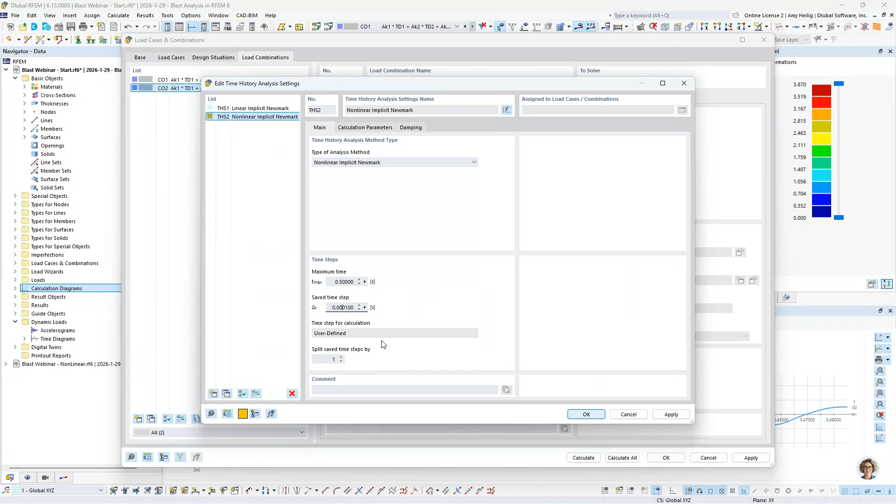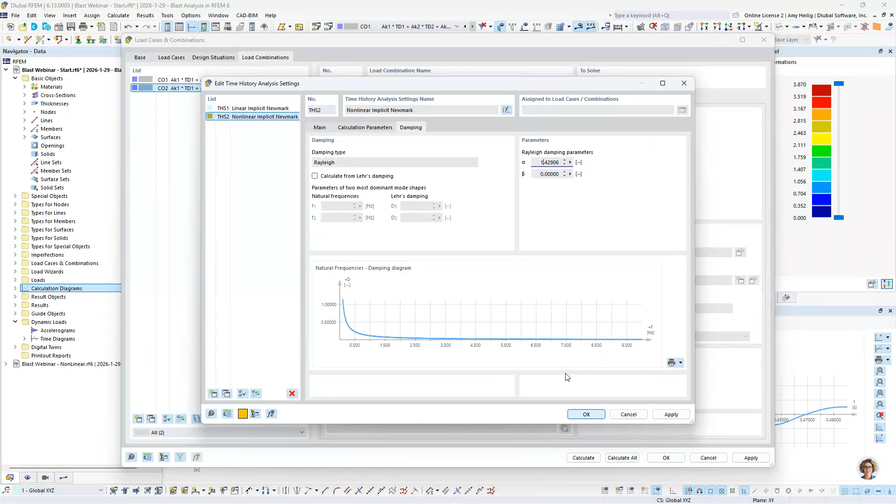For the damping, it is important to know that in the current state for this nonlinear Newmark solver we cannot consider the beta damping parameter. So it would be best to actually set this to 0. Now alpha is still considered, and we will continue to improve on that in the future as well. But we do need to get convergence for this calculation, and we can only do so by setting beta equal to 0.

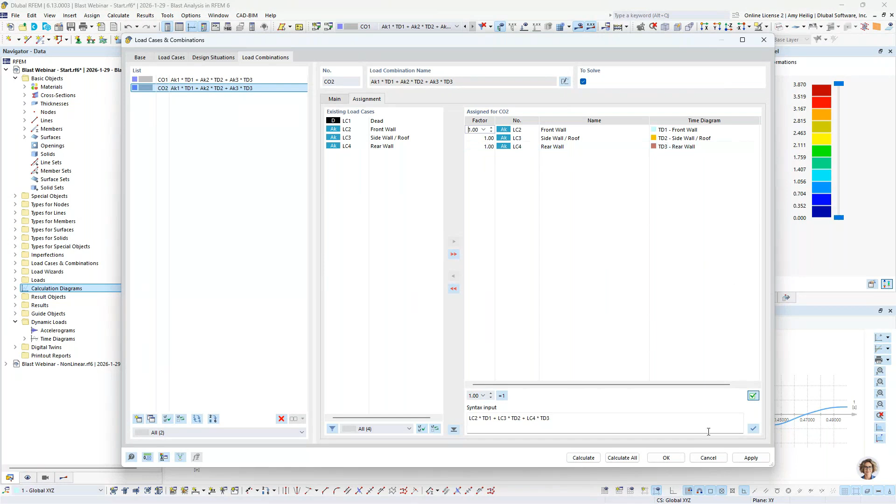So once this information is set, we're really ready to run the calculation by selecting these new analysis settings here that we just defined for the second load combination. Everything else is the same under the assignment tab. Again, those load cases are associated with the relevant time diagrams. Now, I have an already saved model here that I'll go ahead and open up because the calculation does take a few minutes longer for that nonlinear analysis.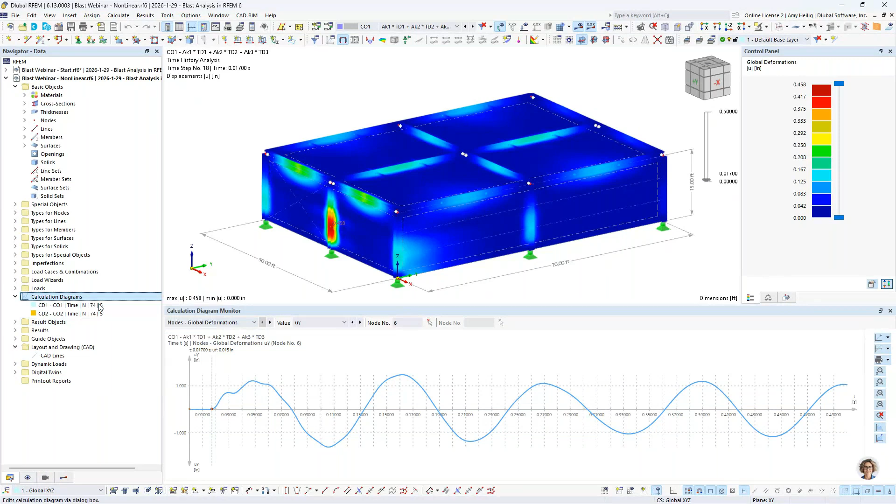So if we go into that calculation diagram, remember, this is exactly what we just saw for our linear time history analysis. Well, I made a copy of this one by using the copy tool down in the lower left to select here my nonlinear time history analysis, that load combination number 2 here. And we can see that it's a pretty big difference.

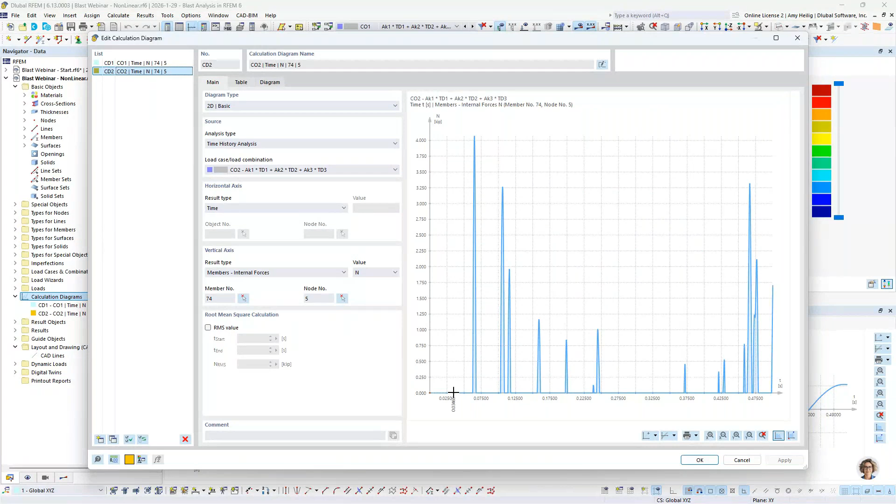We are now able to account that this is a nonlinear tension only member. Therefore, we should see only tension forces in the positive area of this diagram. The minute that it sees compression, it's completely deactivated from the calculation. So certainly a significant difference here if we are wanting to consider those nonlinearities.

If I do zoom in here, it's also important for these nonlinear calculations that we get these more or less smooth curves here. If you're seeing very jagged results in this diagram, that probably means that you need to decrease your save time steps and possibly even your time steps for your calculation further.

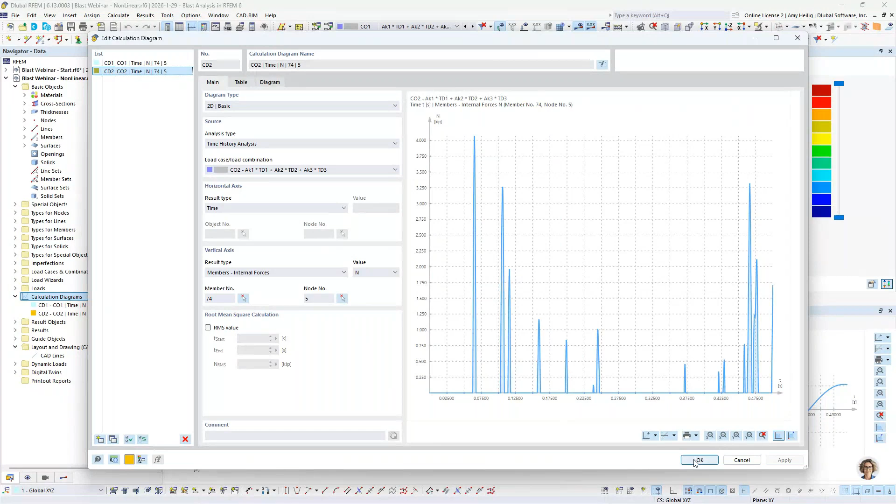Okay, so that will wrap up our full example today, going through both the linear time history analysis as well as the nonlinear. We'll go back to the PowerPoint here to wrap up today's presentation.